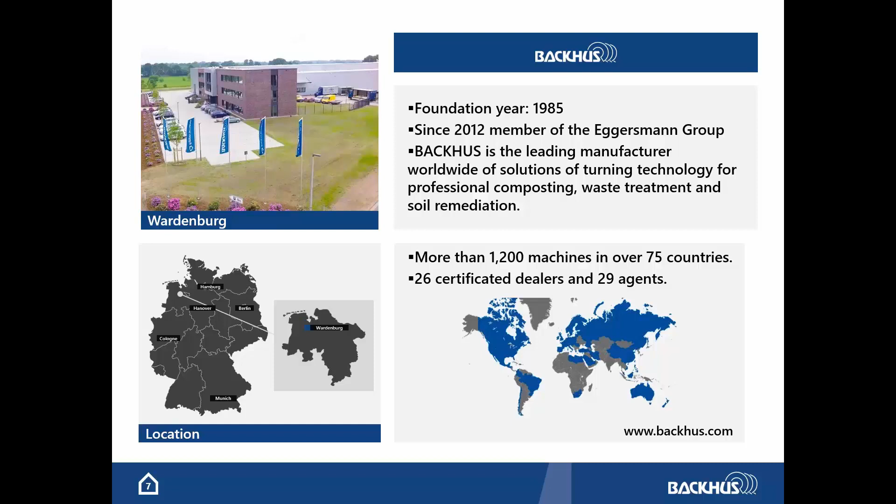The dealer network includes 26 certified dealers and 29 agents. Our bread and butter lines are the windrow turners.

We build two different kinds of windrow turners. The A series is our full liner with high comfort and a lot of variations and options. The B series is quite simply with less variations and options. The main task of these machines is to turn material and add oxygen to the material.

The applications for these machines are very different. They will be used for bio-waste composting, biological drying, stable dung composting, and many more.

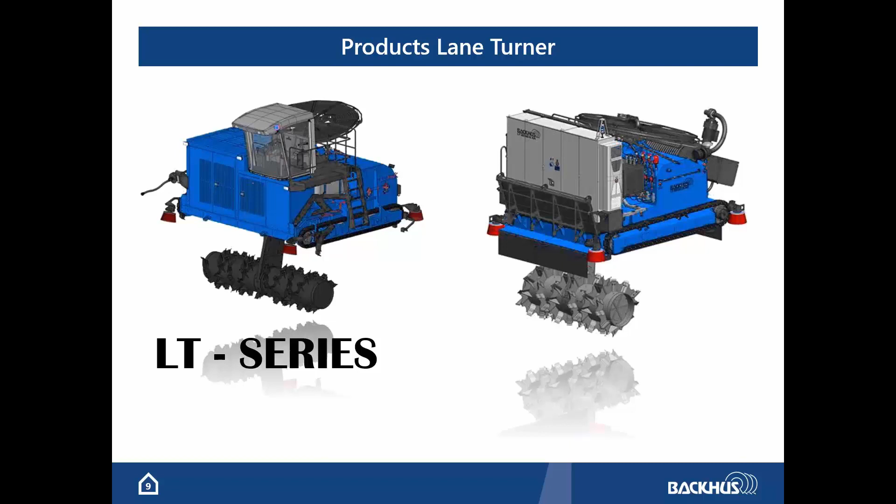The second part are the lane turners. These kinds of machines are built for the plant construction. We differentiate between two types: the first one is a full automatic mold machine, and the second one is a semi-automatic mold machine with a cabin.

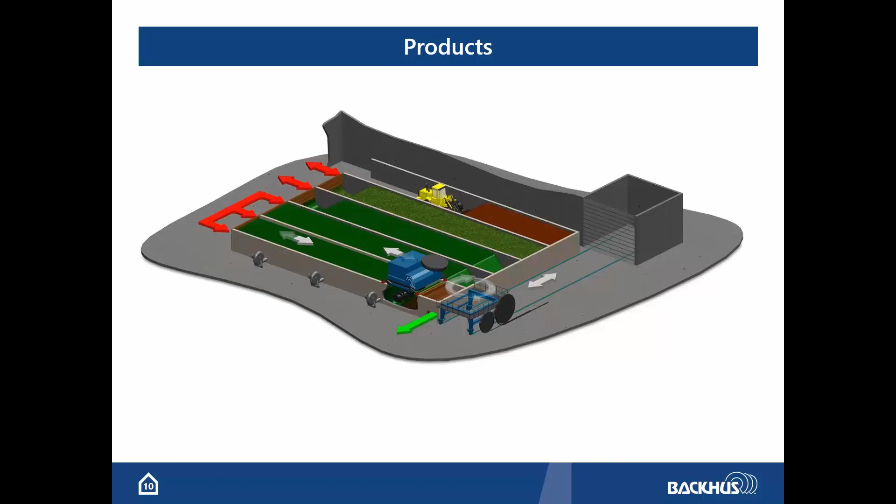On the picture you can see a schematic presentation of the working sequence of a full automatic lane turner. The red arrows show the location of the filling side. In this case, the input of the material will be done by wheel loader. The green arrow shows the output, and on the side of the output you can find the transfer ring.

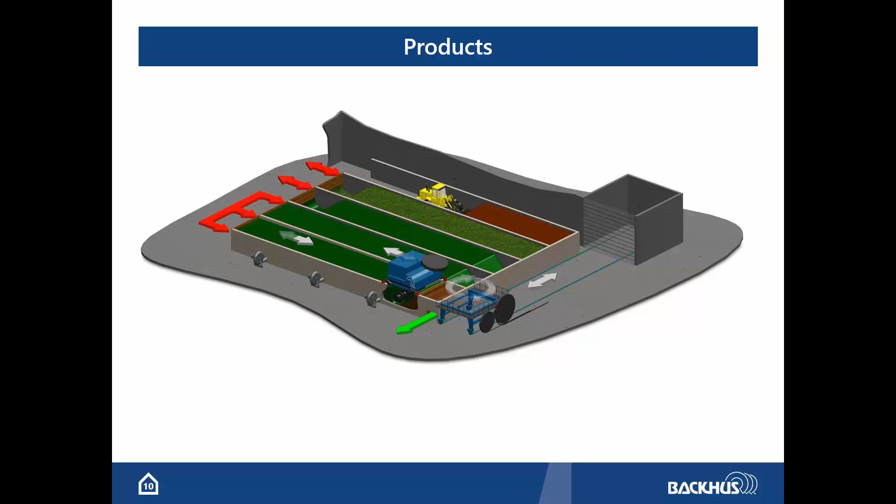The transfer ring moves the lane turner from one lane to another. The lane turner drives into the lane, lowers the drum, and starts turning the material to the end of the lane. That is a short round-up and a few words about the working process of a lane turner.

We build 3 different machine types with different options and variations. All in all, we build around 100 machines per year. We continuously further develop the duplicate parts. There are around 40 wiring harnesses per each machine type.

For each machine we designed a modular wiring harness for plug-and-play installation.

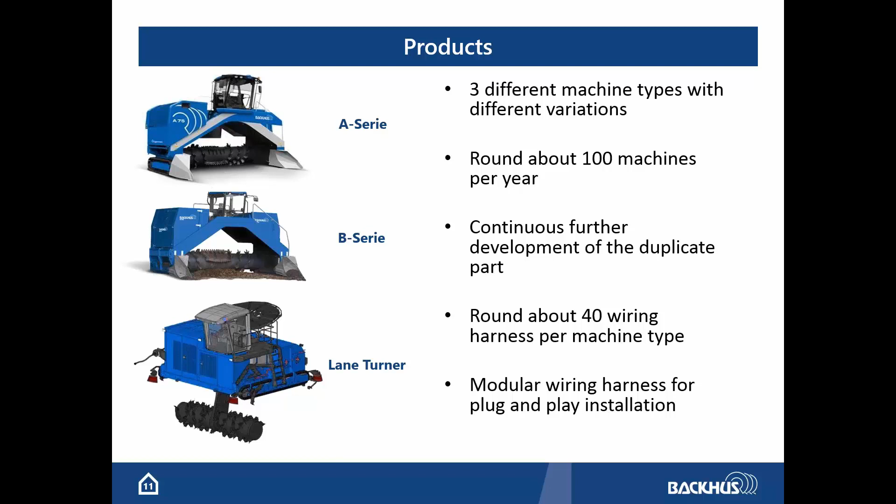The BACKHUS company is part of the Eggersmann Group. The Eggersmann Group is expert on solutions for recycling technologies. BACKHUS's electrical department designs the electrical circuits, diagrams, and the modular wiring harness for different brands of the Eggersmann Group, like Forus. The Forus company is a specialist in building double shaft pre-shredders.

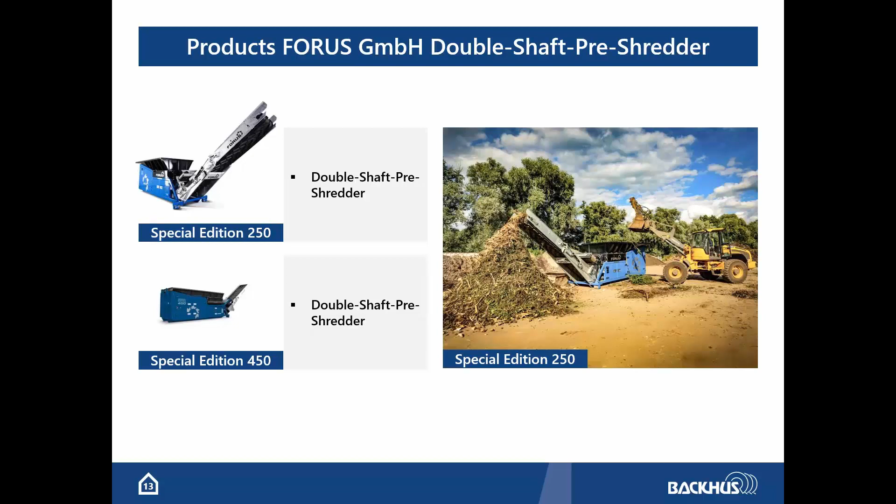The Teuton is a high-class single-shaft shredder with a motor power of 550 horsepower and a weight of 32 tons. The company Terra Select is a specialist in separation technology. They build wind sifters, trommel screens, and star screens. This is a brief summary of what the company does.

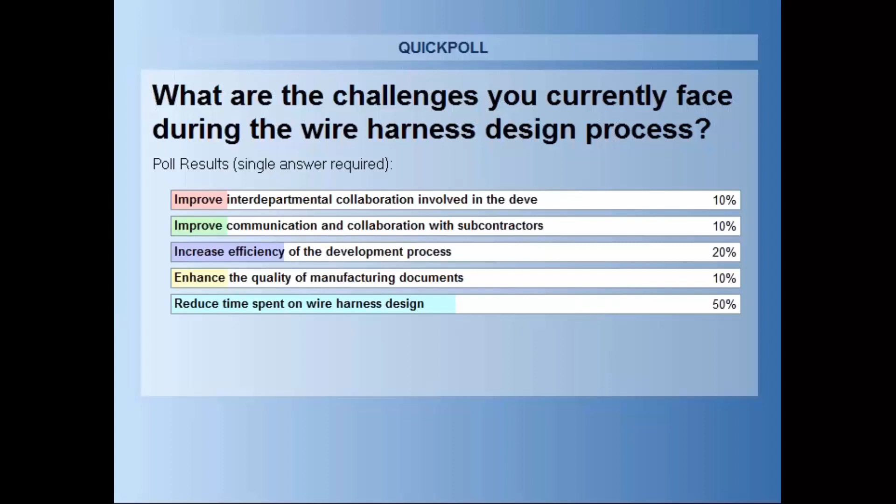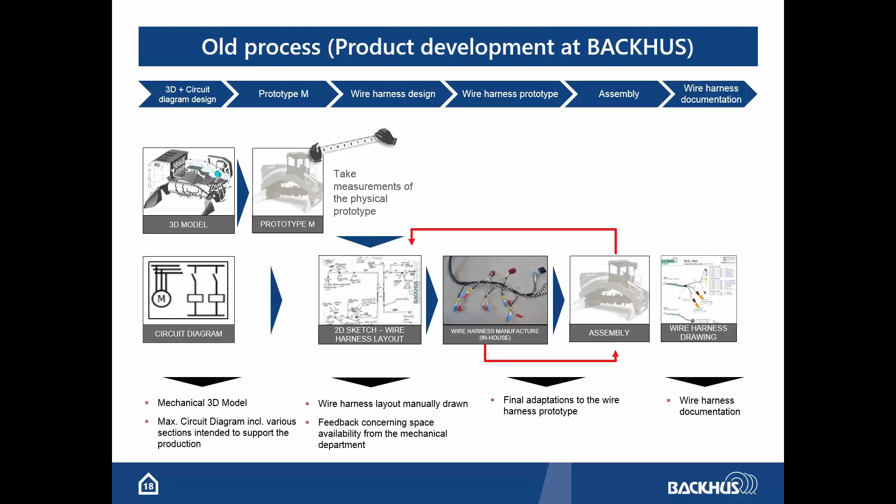We often had to change our wiring harness diagram and revise the wiring harness. This iteration stole a lot of time. We couldn't complete the final diagram before building the prototype of the machine. During development we produced a lot of wasted time, going through several iterations dependent on a physical prototype. The wiring harness layout couldn't finish before the mechanical department determined the length of the harness.

The electrical department had to wait for the mechanical department to deliver lengths from the CAD system. The wiring harness layout took a lot of time because it was a static graphic design without connections to ePlan P8, and was made manually. The documentation didn't have all the information needed, and it would have taken a huge amount of effort to specify all the details.

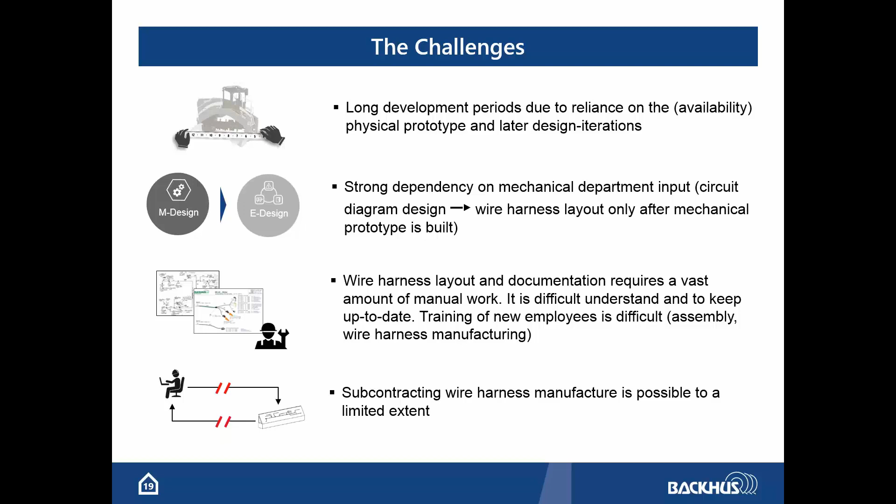Without complete documentation, external production of the wiring harness was limited. So we searched for a solution to combine data from ePlan P8 and Solidworks, and a system for wiring harness design on the 3D model. Our requirement was easy software handling and easy CAD handling, so that electricians had a short learning time to work efficiently with the software.

Now, the new process with ePlan Harness Pro D involves parallel development and design of the 3D model and circuit diagram. We design the 3D model in Solidworks, transfer data from Solidworks and the connection list from ePlan P8 to Harness Pro D, and design the wiring harness in Harness Pro D directly on the 3D model. We don't have to wait for the mechanical department. The wiring harness layout is designed automatically with all the information an external supplier needs.

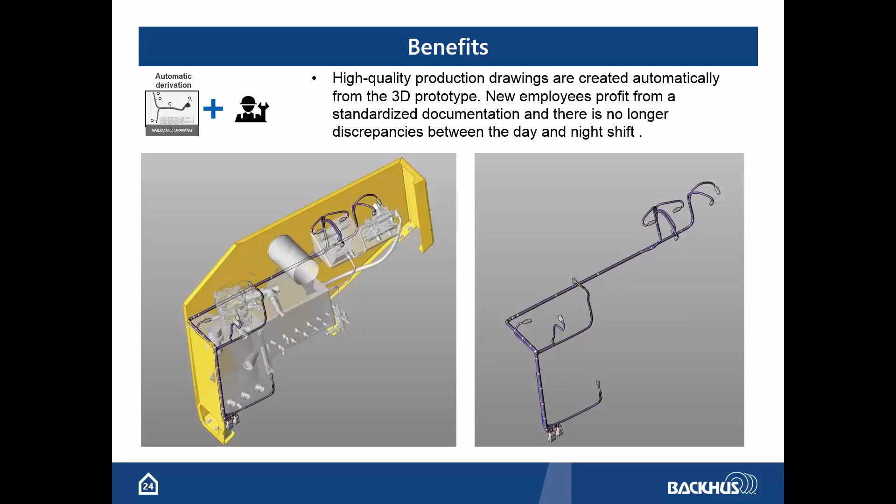The assembly documentation is well structured. We now have a modular wiring harness, so we were able to optimize the process so that waiting times between mechanical and electrical workers are lower than before. And now we are able to speak with different external suppliers at the same time.

We have more flexibility in choosing our harness subcontractor. We can be sure that we get the same result from different subcontractors. We can decide if we want to produce the wiring harness in-house or external. These are the benefits we have experienced so far.

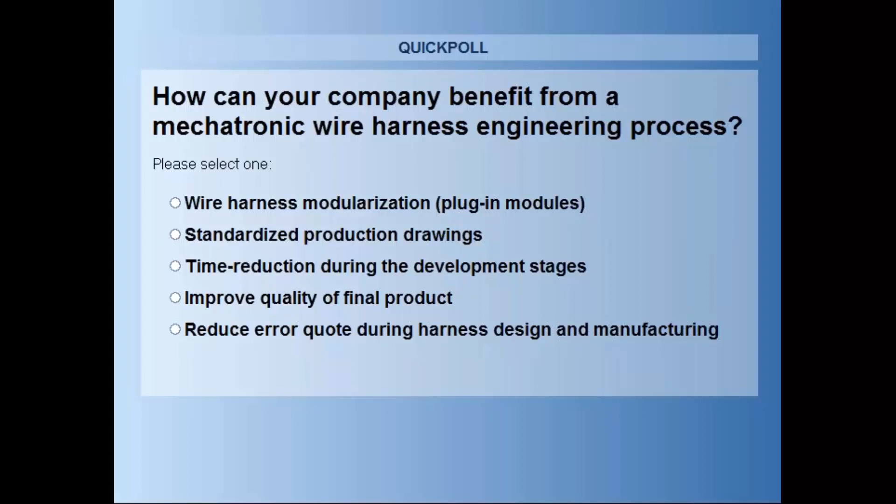Now you should be able to see the results of the poll on the screen. 60% is saying a mechatronic wire harness design process would help them to reduce the time during the development stages. The second point is reducing the error quote during the harness design and manufacturing process, and then improving the quality of the final product.

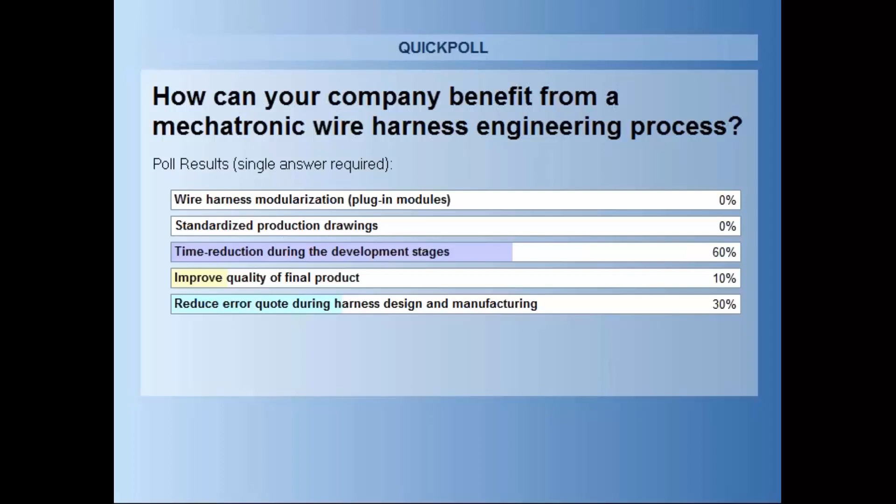And apparently, Mr. Brinkman, none of them thinks the standardized production drawings design is an interesting topic, nor wire harness modularization and the plug-in module, so nobody voted for those. All right, so let's start with the questions.

The first question from the audience is from Ruben, and Ruben is asking, is it possible to display and hide intelligent and/or graphic elements in harness, just like in ePlan P8, through the options technique module? This is actually quite an interesting topic when it comes to modularization, handling variants and options. So how are you doing this today, working with Electric P8 and Harness Pro-D?

Now we do it by the ePlan P8 project options. We have a maximal project with all information in this project, and we can hide the options or change variations, and only have to set some marks in the project options and can change everything and configure our machine.

Excellent. The next question: we were discussing before the webcast that the department at BACKHUS led by Mr. Brinkman is not only doing the design for BACKHUS, but also for other companies of the Eggersmann Group. Having this in mind, Jiri is asking, how do you maintain wire harness types? Let's say in a product range, you have a machine with extended functionalities and the same harness needs to be extended.

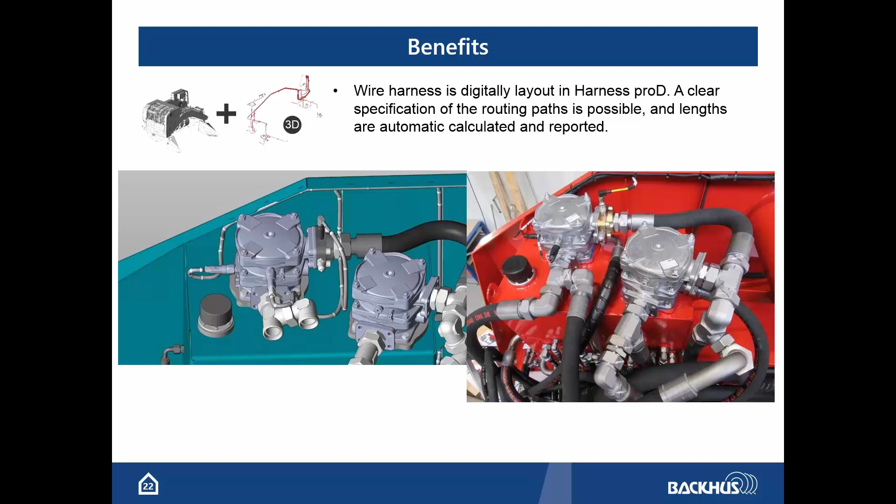Okay. The next question, how do you treat CAD data in P8 and Pro-D with Solidworks? So let me see if I understand this question right. I guess it's how the data workflow is when having these three different software: the mechanical department is working with Solidworks, then you have the schematic done in Electric P8, and now the wire harness design done in 3D in Harness Pro-D.

So with these three constellations, how is the data workflow? We import the data from the mechanical department as STEP data into Harness Pro-D and can work on the STEP model. You mentioned the electrical engineers are importing the STEP data into Harness Pro-D, and then they are doing the 3D layout of the design. Yes, right. So what I can read out of this is that the electrical engineers have the full responsibility of the wire harness design, even though it is in 3D? Yes, that's right.

The next question, and this is a good one: what engineering tools are you using for revision management? We now use our ERP system for the revision documentation. So the drawings are maintained on the ERP system? Yeah. We can make a revision documentation with our ERP system, yes.

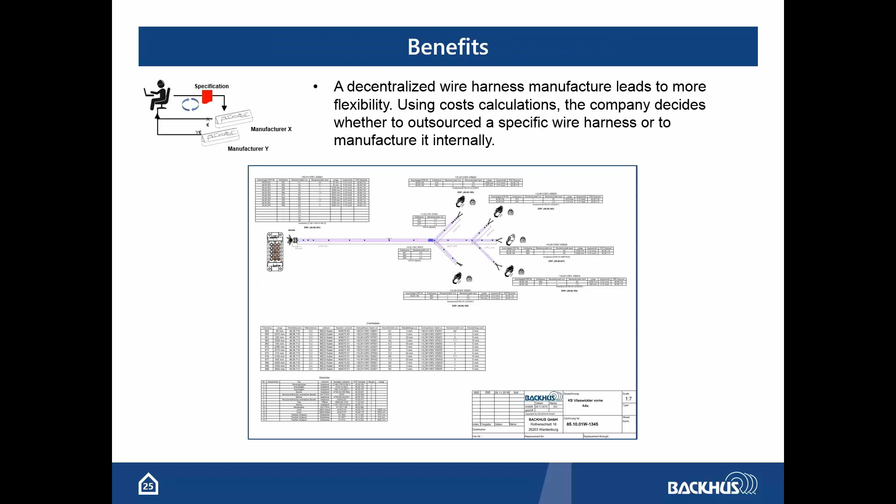So the next question is related to change management too. How does your mechanical department notify the electrical department of changes to the mechanical models? We have an extra tool in Microsoft Excel for this, and the change management of the mechanical department is in this Excel document, and they will send an email to us if there are changes on the machine that are interesting for us. All right. So you have developed an in-house solution for this communication of changes. Yeah. We get the information that they are changing, and then we talk to the person in the mechanical department. All right.

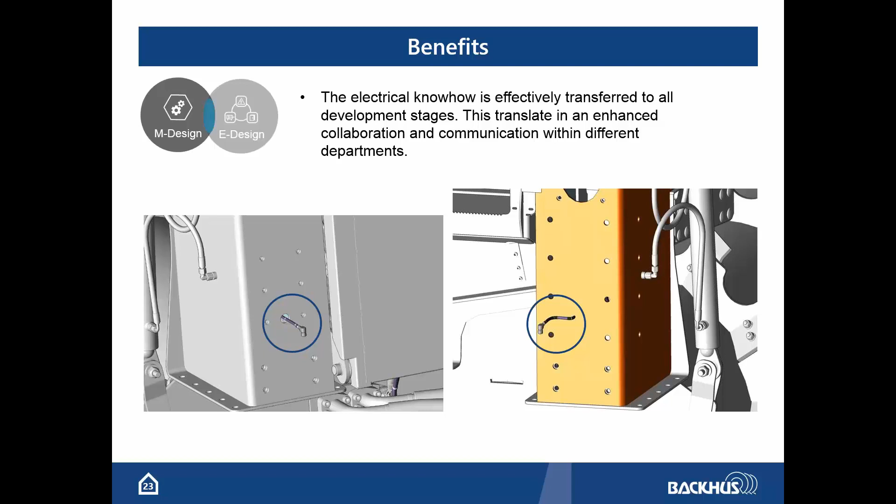Jake is asking, is Harness proD difficult to use when you make some 3D part models? No, it's easy to use. Our electricians work with this system, and it's intuitive and easy to use.

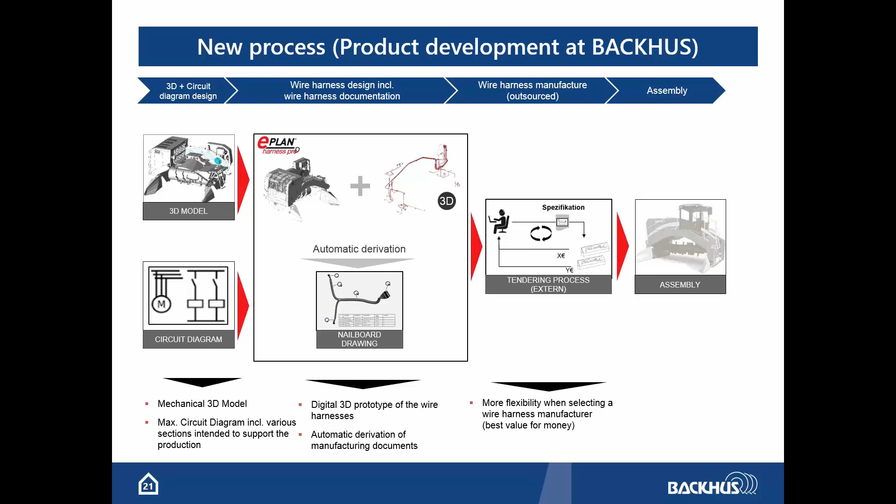Is it possible to transfer the cables created in Harness proD back to the 3D main design software, SolidWorks, Pro/E or CATIA? I think it's possible, but we don't do it. You don't transfer the information back. We want to do it in the future, but until now we don't have it. Okay. And Ruben, I can also tell you from the software perspective that out of Harness proD you have the possibility to export the wire harness design, the 3D prototype, in different neutral formats. And these neutral formats can of course be imported into SolidWorks, Pro/E, CATIA, and other mechanical software.